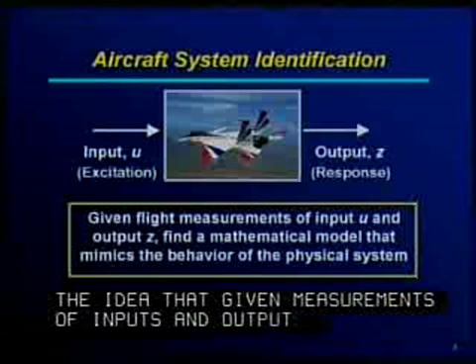The topic area that covers this problem of determining aircraft stability and control, or determining a model of a physical system from measured inputs and outputs, is called system identification. And our system that I'll be discussing here is the aircraft, the rigid body aircraft, in fact, is what I'll be talking about, although it does not have to be rigid. The idea is that given measurements of inputs and outputs to a physical system, we'd like to infer or determine what the mathematical model would be of that system that could behave in an equivalent way, or mimic the system's behavior in some way.

Now, for an aircraft, there are multiple inputs. We have more than one input, of course, and the inputs are generally control surface deflections. So we might have stabilator deflection and canard deflection on this particular aircraft. And the outputs are responses like vertical acceleration and pitch rate, angle of attack, and so on. Now, it's not necessary that the system be the airframe of the aircraft. That's what I'll be talking about today, because that's what's relevant to aircraft stability and control. But system identification can be applied to an actuator, for example, or to an engine. But we're going to talk about an aircraft rigid body in this talk. So, next slide, please.

System identification is really one of three general problems in dynamics. We have the input to the system, which in our case is the aircraft, and the outputs, and the system is the aircraft itself. For simulation problems, we know the inputs because we've measured them from a pilot, and we have a model of the aircraft, and we predict the outputs. For the control problem, we have a way we'd like the aircraft to behave, we have a model of the system, and we compute the inputs. System identification is sometimes called the third problem, or the inverse problem, where we have measurements of the inputs and the outputs, and we try to determine what the model of the physical system is.

You can see from this slide the importance of identification to simulation and control, because the output of identification is a model of the system, which both simulation and control require to do their job. I'm talking at a high level here, of course.

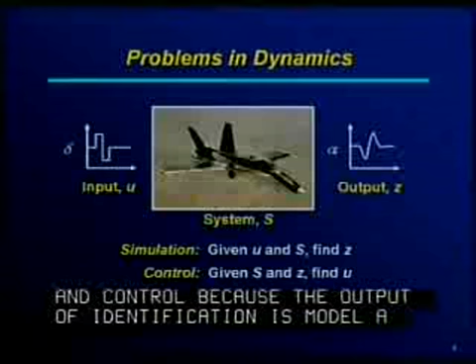I tried to minimize the number of equations I present, but sometimes I just couldn't get around it. What I have here are Newton's second law for translational motion of the CG and for rotational motion about the CG, written in vector form - three-dimensional vectors on the top line and the second line. The MA part of F equals MA is on the left side of these equations. We know the form of these equations, we have for many years.

But what we don't know are things on the right side. We do know the force due to gravity and can characterize that. Very often we do ground tests for the engine, so we also have the propulsion forces. Also for stability and control, a lot of times the propulsion is not modeled dynamically, so we'll have a model for the propulsion from these ground tests that we'll use. That leaves one last term, the forcing function, the aerodynamic forcing functions. The same can be applied to the second equation. We need the aerodynamic forcing function for this equation in order to fill it all out and be able to do simulation and control work.

Now, the difficulty is that there's not, at the present time, an analytical way to do that, aside from computational fluid dynamics, which is still not quite to the level it needs to be to do all those problems. So we want to characterize that experimentally, and what I want to talk about here is how to do that on board the aircraft in real time.

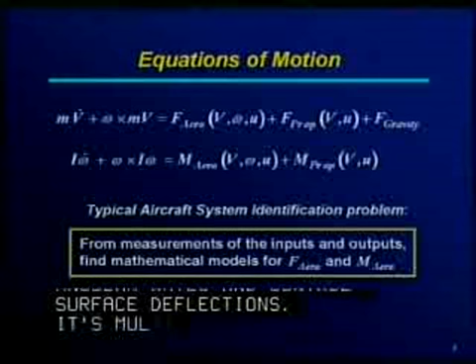One of the things I've tried to get across with this notation is that the aerodynamic forces and moments are nonlinear functions of multiple variables - the speed of the aircraft through the air, flow angles, angular rates, control surface deflections, and so on. So it's multivariable, nonlinear in general, and we'd like to characterize that. For measurements of the inputs and outputs, we need to find models for those forcing functions, what I'm calling F and M for the forces and moments.

As I mentioned, the forces and moments are nonlinear functions of the variables. What I've done here is simplified it way down - I'll only take a look at the lift coefficient, the non-dimensional lift coefficient, so non-dimensional aerodynamic force as a function of angle of attack, and that's all. Of course it's a function of more than just angle of attack, but this is just for demonstration purposes. You see the familiar nonlinear character of the lift coefficient with angle of attack, where there's a stall break at a certain angle of attack. So this is a nonlinear dependency between the lift coefficient and angle of attack.

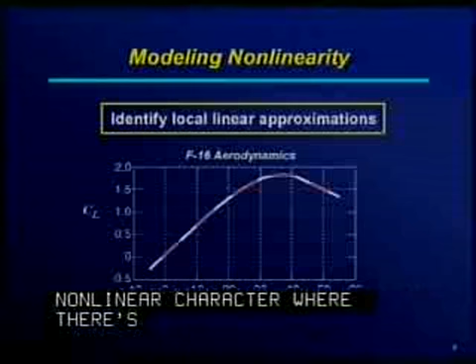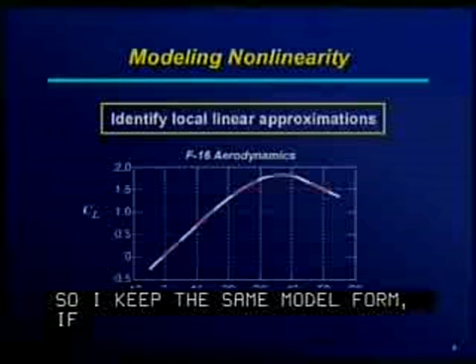One way to describe that is to describe it in local areas of angle of attack as linear approximations. In the aggregate, if I look at all those linear functions together, I can describe very well the nonlinear character of that curve. So I keep the same model form - the lift coefficient is a linear function of alpha - but I let the slope, or CL alpha as it's sometimes called, change depending on where I am locally in angle of attack. This, by the way, is real data from an F-16 wind tunnel test.

Everything I'll show you is either experimental data or wind tunnel data, flight test data for the most part. So no simulation data in any of this. That's the general idea.

We'd like to try to characterize nonlinearity by using a linear approximation with slopes that can change with time.

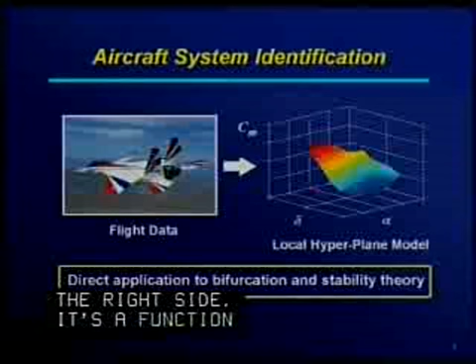So if I go up one dimension now, I'm looking at non-dimensional pitching moment, aerodynamic pitching moment, called CM in the plot on the right side. It's now a function of one of the controls, let's say stabilator, which I'm calling delta, and angle of attack again. I'm still only in 3 dimensions here because that's what I can draw, and you see now I have a surface dependency.

A nonlinear surface is wavy, but I want to characterize that nonlinearity of the pitching moment dependency on alpha and delta, and I can do that with approximating planes. In 2 dimensions, it's a plane, but when there's more than 2 independent or explanatory variables, which there are in general because there's more than one control, we do the same thing but call the approximating planes hyperplanes.

So what we want to do is characterize nonlinearity with hyperplanes that can change their slope according to where we are in the flight variables, or where we are in the independent variable space, explanatory variable space.

Now this approach has legs, and what I mean is that the latest and greatest methods we have for characterizing nonlinear dynamics are based on local linear approximations and the eigenvalues that can be computed from that. So if we have something continually finding the best local linear approximation to what is really a nonlinear dependency, that feeds right into nonlinear dynamic analysis techniques such as bifurcation theory and stability theory.

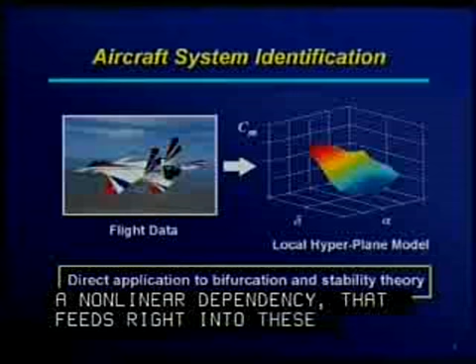So now we get down to some details of how you do that. If I take the pitching moment, and now I haven't non-dimensionalized it, I've kept it dimensional just for notational simplicity, though we could do it non-dimensionally, and in fact it usually is. This is right out of the equation - the thing I need is the pitching moment, aerodynamic pitching moment.

What I want to do is characterize that in terms of a linear expansion in things I can measure, like angle of attack, pitch rate, and control deflection. Here I only have one control deflection, but there are many, so this is simplified in that sense also. On the right side there's this character nu, which is the part that's left over, the part I can't model with this linear approximation, which of course is an approximation.

One reason I want to do this is that I'd like to have a functional dependency description in terms of things I measure, like angle of attack and pitch rate, so I can predict what the pitching moment will be. That's my goal. It turns out you can do this kind of modeling equation by equation - individual equations, and here I'm just looking at the pitching moment equation.

One approach is to say, well, in that pitching moment equation, I know everything except the aerodynamic forcing function. So I solve that equation for everything except that, right? And on the right side, I have measurements of alpha and q and the control deflections.

For a modern flight test aircraft, the data system can measure all these things at about 50 hertz - that's 50 times a second I can get measurements for alpha, q, and delta, and measurements for the left side because I have measurements of everything else in the equation except the pitching moment. So I can write this equation down 50 times every second, but I've only got 4 unknowns if you look at that equation. So I've got 50 equations and 4 unknowns - it's an overdetermined set of equations, which I can solve with linear least squares. That's the general idea of how to go about this.

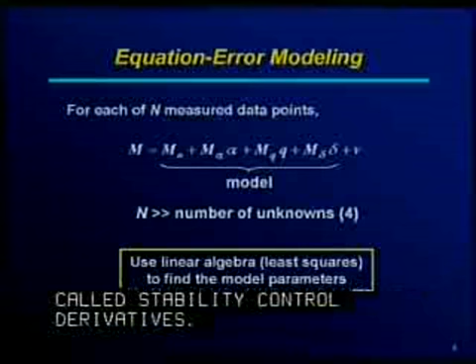Now, of course, every second—or maybe every 2 seconds—I get a new set of points, then I do it again, and I get different slopes with different characteristics. These characteristics, the M alphas and the MQs and so on, are called stability and control derivatives, as many of you probably know. They have physical interpretations. The M alpha, for example, is a static stability term. The MQ is a damping term. And the M delta are control power, control effectiveness.

So the values of those quantities can be interpreted in terms of the stability and control of the aircraft. That's the idea, and the number of points is much greater than the number of unknowns, so we can use linear algebra to do this in what they call a one-shot solution—in other words, we don't have to iterate to get this solution, we can do it in one shot. You might also note that what we're really doing is using a multivariable Taylor series expansion and dropping all the nonlinear terms, just using the linear terms.

All right, next slide, please. So.

Why would you want to do this? Aircraft system identification—I have several reasons here, there are more. But in general, one reason is what we call flight envelope expansion.

We have an aircraft that maybe is predicted to fly in a certain way, and we start out flying it in a safe region, then systematically do testing and analysis to look at the stability and control characteristics as we move up in, let's say, Mach number or angle of attack, making sure the aircraft is okay to continue. That's very time-consuming, usually done flight by flight, very carefully and methodically. System identification is right in the middle of that, because that's how we analyze the flight data to determine stability and control.

Also, the next few items—the two at the bottom—are what we already talked about: simulation and control design both require models of the aircraft, and these models can be updated and made more accurate using flight results.

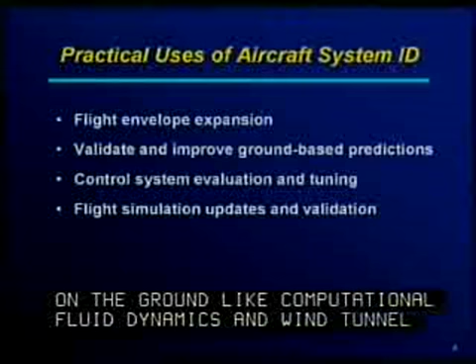And also, another reason to do system identification is that prediction methods used on the ground, like computational fluid dynamics and even wind tunnel testing, we'd like to know after the fact how close those predictions were to what the aircraft actually does. And what the aircraft actually does is determined using these system identification techniques.

This slide is just to describe that it's not easy to do this for a number of reasons. One of them is that the aerodynamic dependencies are not simple, as I discussed before—they're multivariate and, in general, nonlinear.

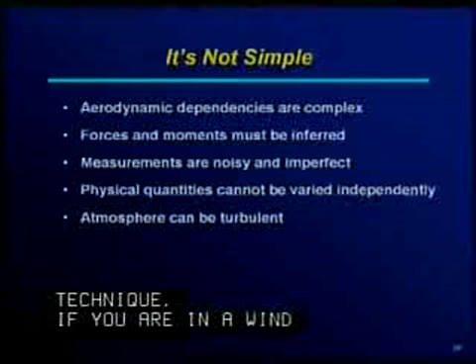The forces and moments have to be inferred from the equations, as I mentioned in passing. If you're in a wind tunnel test, you can put a model on a sting and measure the forces and moments directly through a balance. In an aircraft in flight, you cannot do that, because it's a free body flying in the air. So what we do is infer what the forces and moments must have been by measuring everything else in the equation except for the forces and moments.

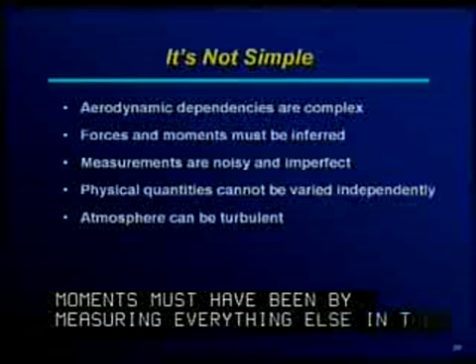Measurements are noisy and imperfect, like they are in any experiment, which is equivalent to saying we want to see the truth, but we have to look through a little bit of fog to see it. That complicates matters, of course.

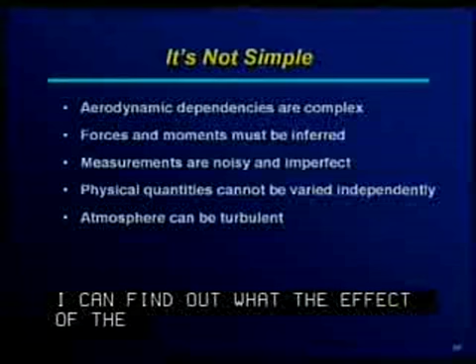The physical quantities cannot be varied independently. Looking back at a wind tunnel test, I can put a model in the wind tunnel and change the stabilator deflection without changing anything else, and by that means find out what the effect of the stabilator is. For an aircraft in flight, as soon as I move the stabilator, the aircraft pitches, the angle of attack changes, and so on. So you have a more complicated situation—I can't move one thing at a time with everything else fixed; as soon as I move one thing, everything's in motion. That complicates the experiment design.

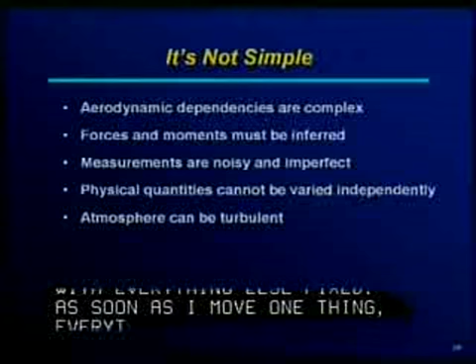Further complicating it is that a lot of times you have aircraft with active feedback control operating, which essentially means I'm going to start moving the stabilator, for example, in response to pitch motion.

Since the control law is doing that, it's actually correlating those variables. And if you remember back to the slide when we talked about identification, I need all variables doing something differently so I can tell which one is responsible for which variations in the pitching moment, to get those influence coefficients. This complicates things, and the atmosphere isn't always still—it's turbulent, which can be equated to an unmeasured input. So all these things make the problem difficult.

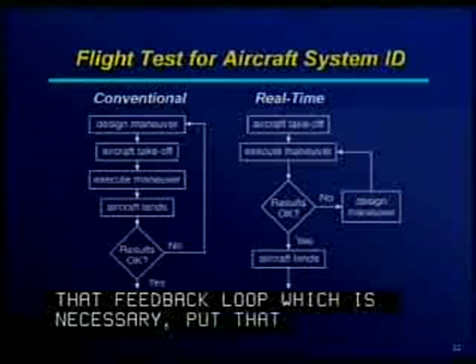So one idea that's come up is: why don't we put that necessary feedback loop inside the aircraft's takeoff and landing? In other words, do it in flight while the aircraft is still flying. You take off with a maneuver you start with, then analyze the data online while the aircraft's in the air, iterate by redesigning the maneuvers, and don't land until you're sure you have the data you were after. This makes for a huge improvement in efficiency, especially for things like envelope expansion.

Next slide, please. So one of the first projects to use this sort of idea was the NASA Pathfinder. This aircraft was solar-powered, 99 feet wingspan, and flew very slowly. It was a very flexible aircraft, as you can see from the picture, and it had unsteady aerodynamic effects as well as flexibility.

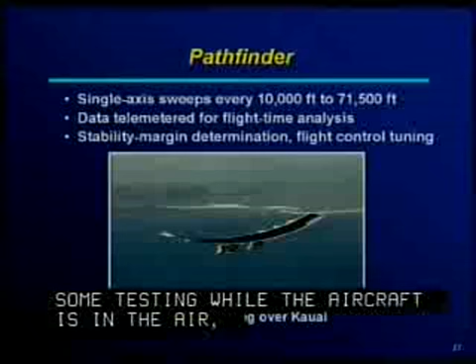One idea that was developed and executed in this project was: why don't we do some testing while the aircraft is in the air, telemeter the data down, do the analysis on the ground, and then based on that analysis either change the control gains or continue flight tests with the gains as they are. This was done with single-axis frequency sweeps, where one control at a time was moved in a slow sinusoidal fashion, progressively increasing in frequency, to get a wide range of frequency inputs to characterize the dynamics. A spectral frequency response estimation method was used for the modeling.

So this was done every 10,000 feet for this aircraft. The aircraft took about 50 minutes to climb every 10,000 feet, so there was time to do this. The data was telemetered down, it was analyzed, people made the decision about the stability margins and the flight control tuning, whether the gain should be changed. That was dialed in from the ground, and then onward to the next point.

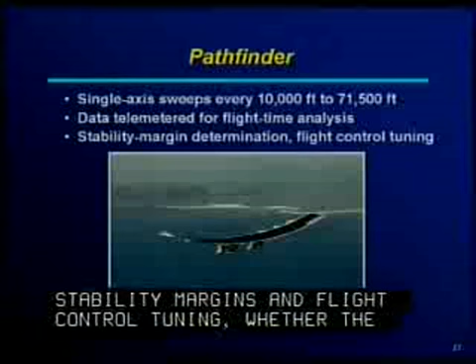And this worked very well, and in fact, the Pathfinder set a record of 71,500 feet. It was a record for both propeller aircraft and solar aircraft at the time, later broken by other aircraft, but this was a record at the time. So this was the first sort of approach to having the analysis go on while the aircraft was in the air, and it was feasible because this aircraft was very slow and climbed very slowly. There was a lot of time to do the testing.

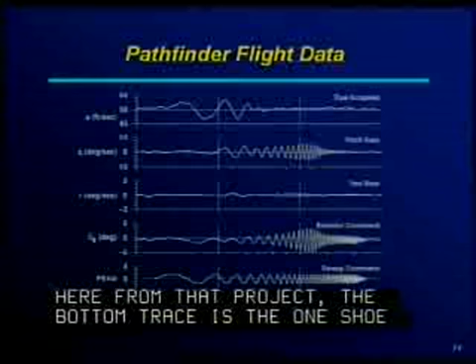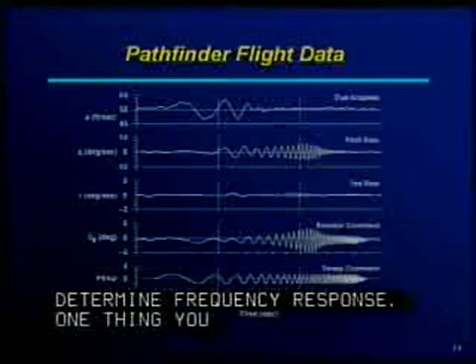Next slide, please. So I'm just showing a little flight data here from that project. And the bottom trace is the one you should look at there. That is the frequency sweep that I spoke of, where we move one surface first into slow frequency and then an increasing frequency as it goes up, and then use what they call spectral estimation to identify a Bode plot, you might say, or frequency response. But one thing you might know from this plot is that you need, when you use that method, it takes quite a lot of data to do it, to get good spectral estimates.

And in fact, you see there's 90 seconds there, and that's 90 seconds for each input, right? So each control, done one at a time, right? Which is feasible on this aircraft, but we'd like to do things faster than that.

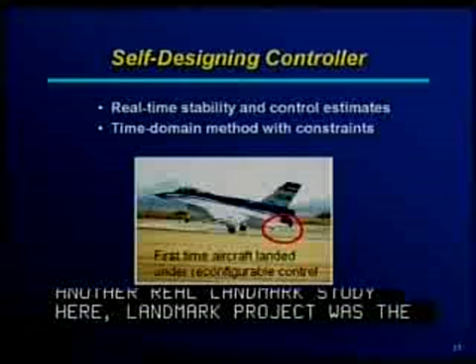Next slide, please. Another really landmark study or landmark project was the self-designing controller. This was an Air Force project, and it was executed by a company called Barron Associates in Charlottesville, Virginia, and also by Lockheed. The idea here was to use real-time stability and control estimation in a manner similar to what I described before, to feed that information as the aircraft changed in flight condition, or maybe would change due to damage or a failure, and to feed that into a reconfigurable controller. And in this case, it was a receding horizon controller, they called it, and have that reconfigure the aircraft control to have it still be controllable and survivable.

One of the main points of this, or one of the things that made a big splash about this project, was that they were able to land the F-16 Vista with a simulated left stabilator failure. So left stabilator was stuck. They had their online estimation routine go through, figure out what the stability and control derivatives were, and reconfigure the control law, or feed that information to a reconfigurable control law to enable the aircraft to land.

So this made a big splash in the field, where you could see the possibilities of this kind of technology. Now, the estimation technique that they used was a time domain method, similar to what I described, but with constraints. And what I mean by that is they had a priori values of the stability and control derivatives, and also some time constraints, some temporal constraints, which needed a bit of tuning to make that work.

And also, that technique did not provide error bounds for the parameter estimates. But still, just an excellent project. And this technology was also used on other projects as well. It was used on an SBIR for the F-18 closed loop reconfiguration, and also on the X-40A project. So, next slide, please.

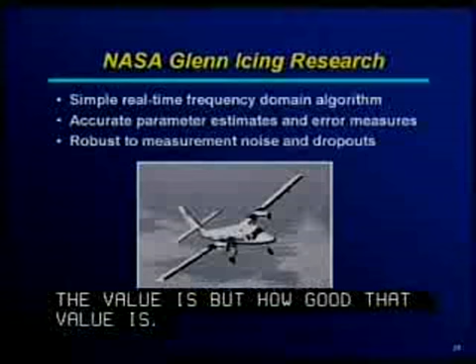So when we estimate these parameters like M alpha and MQ that I showed before, we like to know not only what the value is, but what the error bar is, how good that value is. Those are two important components of getting estimates for these things. So it gives those, and it's really the only technique that does that - it gives the error bars as well as the parameter estimate. The time domain techniques do not do that. And also, it's very robust to measurement noise and dropouts. And of course, when we're doing things online on the aircraft, there's no chance to fix dropouts or to smooth out the noise or filter the noise. There's no chance for that. So, I'll talk more about this technique as we go on. Next slide, please.

Later, at NASA Dryden, as part of the F-15 ACTIVE program and also the IFCS program, Intelligent Flight Control System program, there were some experiments on what kind of inputs should be used for this real-time parameter estimation or real-time modeling. I'll show some results from that also as we go on.

These models are being flown at NASA. These models, as well as others, are associated with an infrastructure called the AirStar system.

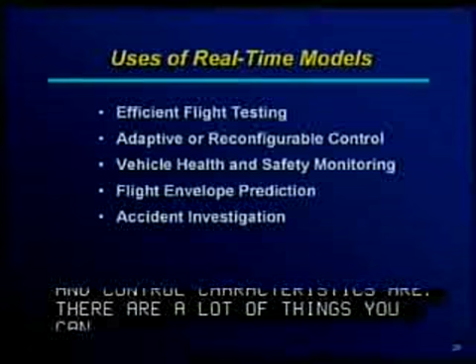This real-time modeling is an area that the more you think about it, the more ideas you come up with for ways to use it. Because what we're really trying to do is have the aircraft at all times have an idea what its own stability and control characteristics are. There are a lot of things you can do with that, one of which is flight envelope prediction. It can also be very useful for accident investigation if you have this kind of information.

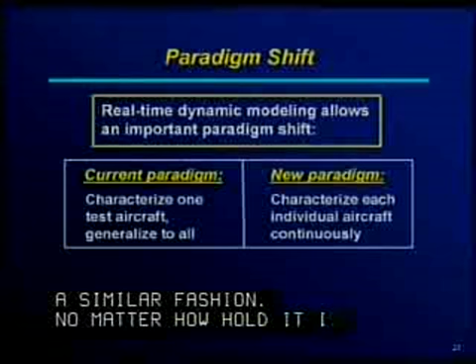So what I have on this slide is a little description of a paradigm shift you can entertain. If you had real-time dynamic modeling, you could change the current paradigm, which is this: we have one or maybe a few test aircraft that we test very thoroughly, and then we assume every other aircraft like that behaves in a similar fashion, no matter how old it is or what's happened to it. If we have real-time modeling or monitoring of the stability and control of the aircraft, we can change that paradigm to characterize every aircraft as it is at its own time, whether it's aging or damaged or something's a little different about it.

We already know that when you get to flight regimes like high angle of attack and high rate, very small changes in the geometry of an aircraft can cause very large changes in the response. So this pushes us towards the method of characterizing each individual aircraft as its own, with its own characterization of itself.

One of the things I mentioned to a colleague recently is that what I'm really trying to do is put somebody like me out of business, because we're trying to get the aircraft to characterize itself, collect its own data, and have it so we can tell a pilot to go fly this aircraft, do some maneuvers—or have the computer do some maneuvers—land the aircraft, and download an updated simulation of the aircraft. That takes me out of the loop completely, which would be okay. There are plenty of other things we could do, but that's one of the goals.

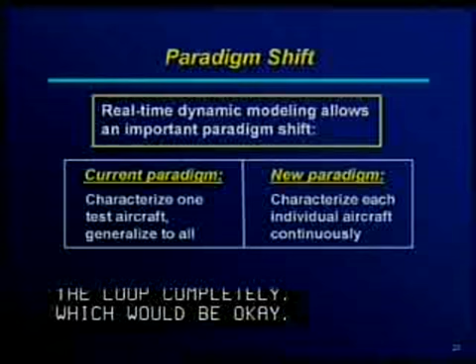So I'd like to now talk about some technical challenges in pulling this off, this being characterizing the stability and control all the time for full envelope flight on board the aircraft. There are a couple of things I wanted to point out that are the main problems at the moment.

One is excitation, which I think we have a good solution for, as I'll show you. Another is data memory, which we don't have a good solution for at the moment—we need to work on that. And there are some practical implementation issues, which I believe we do have answers for. So it's kind of a mixed bag, and of course, as with all research, you go along and find more things you need to address. But I hope I can convey that we're very close to the point where we could have an aircraft characterize its own stability and control all the time.

So what that means is that if I want to know what happens when the elevator or stabilator changes—if I want that linear influence coefficient—I'm going to have to change the elevator to see what happens. You can't just fly along steady. There are a lot of times when an aircraft flies along and nothing's happening, in a steady state—when you fly across the country, for example. So you can't find out what these influence coefficients are unless you move something.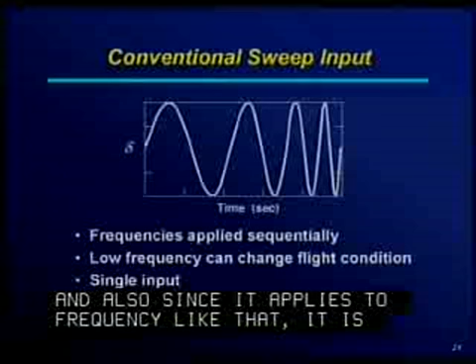One of the problems, though, is that we apply the frequencies sequentially. We start with a low frequency because that excites a low frequency mode, which we need to wait a long time to see since it has long periods. So we start low and then go higher. The problem is the low frequency oscillation sometimes moves you off your condition, moving you from the point that you started at, away from that tangent approximating hyperplane, to somewhere else during the experiment. We don't like that. Also, since it applies frequencies sequentially, it's not efficient, and this type of input works for a single input only, and aircraft have more than one input, so you have to repeat this for each input in turn.

So one idea is: why not take different frequencies—not a continuous stream, but discrete frequencies—and add them all up and apply all the frequencies at once. For example, if I have three frequencies for the input, applied to the stabilator of the aircraft—a mid-frequency, a higher, and yet a higher one—and I add those up, I get the white trace shown on the right. Sometimes the peaks add, sometimes they cancel, and during that time series I get large excursions. I don't like large excursions because they tend to push me off my condition.

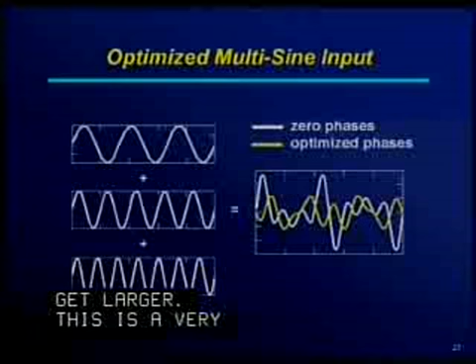So one of the things you can do is take each sinusoid and shift it in time relative to the others, giving them a phase shift, and optimize that phase shift so the peak-to-peak amplitude of the sum is minimized. If you do that, you get the yellow trace, where the peaks are all mashed down to where they're approximately equal across the whole signal, optimized for that. That's as low as you can go. With three frequencies added here, the difference between the large peaks on the white trace and the peaks on the yellow trace gets bigger as you add more frequencies, because more frequencies means larger peaks. So this is a very good technique to still get all the energy into the input without large excursions that push me off my condition. I really want to stay around one condition and do my oscillations locally to that.

So what I want to show you now is a clip from flight test data. This is on the NASA 837 modified F-15 out at Dryden. What they're running here is the equivalent of the white trace before—we just took some discrete sinusoids and added them up. If you watch the background while this is flying, you'll see what I was talking about, this moving off condition. Could we run the first clip, please?

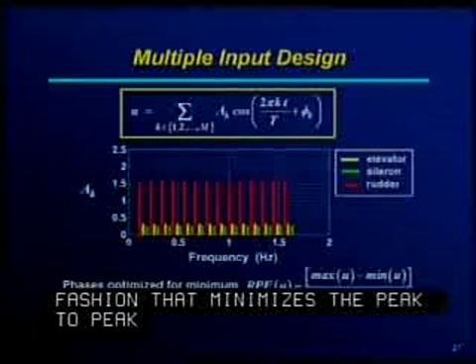So what we'd like to do instead is have these optimized multisines, as we call them, where we shift the phases of the individual components for each input in a fashion that minimizes the peak-to-peak amplitude, so we don't get these large excursions off our flight condition. This technique can also be used when you have more than one control input, which we always do.

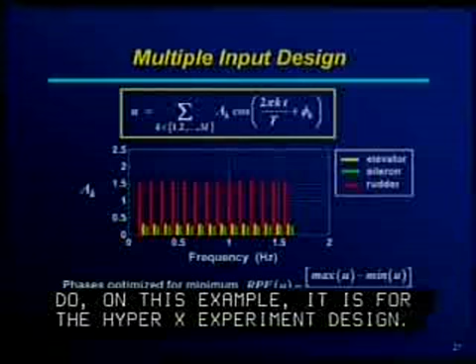This example is actually for the HyperX, from the HyperX experiment design that I'm going to show you in a minute. What you can do is choose these sinusoids so that they're harmonics of one another—a whole set of harmonic sinusoids. If you remember from your math, harmonic sinusoids are orthogonal to each other in the time domain.

So I have harmonic sinusoids that I apply to the three controls, using different frequencies for each control. By doing that, in the time domain, since they're harmonics, they're orthogonal to each other—meaning if I did an inner product of the two time series, I'd get zero. Or, they're the most unlike each other as they could possibly be, another way to say it.

Since I'm using different frequencies, I interleave the frequencies for the different controls, as shown here in the plot. The rudder uses the frequencies in red, the aileron uses the frequencies that are green, and so on. So in the frequency domain, it's also orthogonal—these inputs are orthogonal because they're using different frequencies. This type of input has a great advantage: it produces inputs that are orthogonal both in the time and frequency domain.

So no matter which domain you use for the analysis, you still have orthogonality of these inputs, and that's very important so you can assign the dependencies properly, as we talked about. They're optimized to minimize the peak-to-peak amplitude, shown there in the bottom right, and then there's a measure of the input energy on the bottom. So we want lots of energy in, without too much peak-to-peak amplitude excursion.

The other thing I want to mention is that when you interleave these frequencies, each input has a wide frequency band, because they take turns taking the subsequent frequencies, which are all harmonics of one another. If you just look at the rudder frequencies, there's a wideband input there, and there's a wideband input for the aileron and also for the elevator.

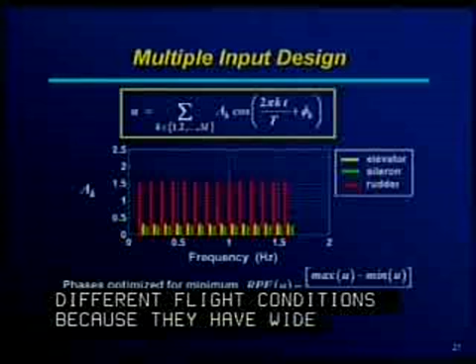So the advantage of this is that you can design the input form one time and use the same input forms for different flight conditions, because they have a wide frequency band. If the natural frequencies float around inside that frequency band, it doesn't matter—you'll hit it somewhere with that wide frequency input.

This is a big advantage for flight test programs, because a lot of times, especially if a computer is doing the input like happened here on HyperX, the computer doesn't have a lot of extra time and space for computing inputs. So we give them one sequence: this is the sequence to run on the rudder every time, and at the same time, run this on the aileron, and at the same time, this on the elevator. Then we only scale the amplitudes for dynamic pressure. It makes for a very efficient test.

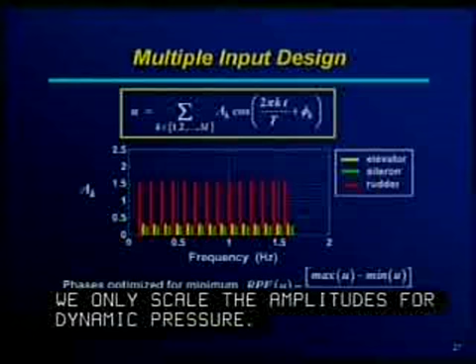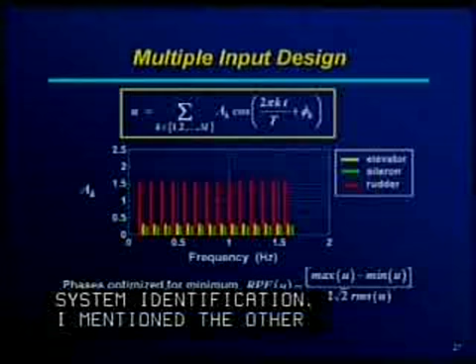It's very brief because everybody's moving at once. We do the lateral and the longitudinal data collection all at once, and we have only one input form. So these inputs are really excellent inputs for system identification. In fact, I mentioned to someone the other week, it's hard for me to imagine how they can get any better than this. It's really a very efficient input. So let's go to the next slide.

I want to show you now how these inputs were used on HyperX during the descent phase of the flight. Next slide, please.

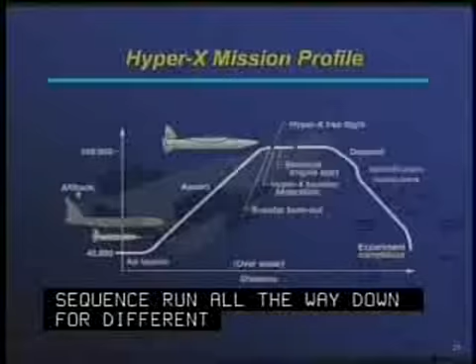So if we could run the next video clip, please. What I'm going to show here now is flight test data run through an animation, because we don't have pictures of the HyperX in its flight. What it's doing is executing this maneuver, which is elevator, rudder, and aileron working all at the same time in an orthogonal fashion. And you see what happens is the motion of the aircraft looks similar to what you might see if it was going through some turbulence.

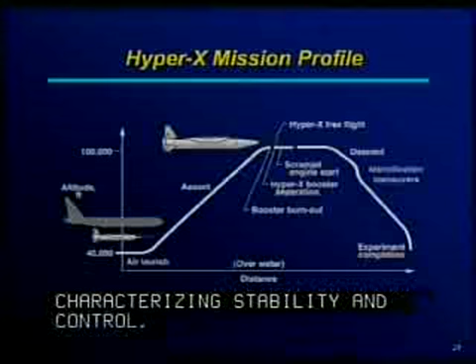The advantage of this is that it keeps the aircraft on its trajectory and just bumps it around a little bit, so the guidance and control guys are very accepting of this type of experiment because it keeps them on their trajectory, doesn't move them off the trajectory, but still you get this excellent flight data for characterizing the stability and control. Because of that, these types of inputs are also being used on the Air Force Falcon project for the same sort of reason, that you can stay on your condition and still collect excellent data. So let's go to the next slide.

What I'm showing here are some results from the flight test data analysis on HyperX, and this is actually the data that you just saw animated. What we're looking at is the pitching moment, the non-dimensional pitching moment, which is CM, in the middle plot there. The data is the white line, and the model is the dashed orange line. As you can see, the model that we identify, and the top line there is the elevator deflection that was designed in the way that I mentioned before.

You see that this looks like something like a random sinusoid. It's not random, of course, but it looks like that - like a buzz on the surfaces, is what I call it sometimes. So we buzz the surfaces. We did that for about 28 seconds or so, maybe less, and collected the data and did the modeling.

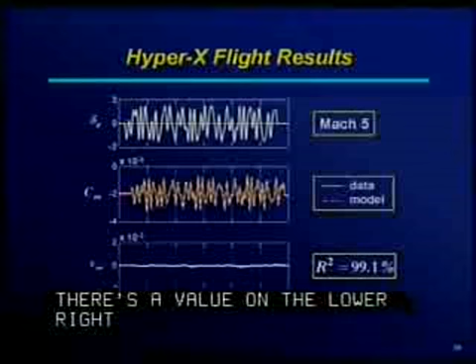The experiment was so good that the modeling, as you can see there, the model matches the data almost perfectly. There's a value in the lower right there called R squared, that's a measure of the model efficiency, the amount of variation that's been explained by the model. It's 99% out of 100. The bottom trace is the difference between the solid line and the dashed orange line, so you can see it's almost a flat trace.

Of noise. I've told people back at Langley I may show these data for the rest of my career, because it doesn't get any better than this. The experiment design was so good that the modeling results just came out terrific. It looks like what a simulation case looks like usually, but this was all flight data. So let's go to the next slide. This was at Mach 5.

I want to say, before I go on, that was not a cherry-picked result. All the results were like that. They all did that well.

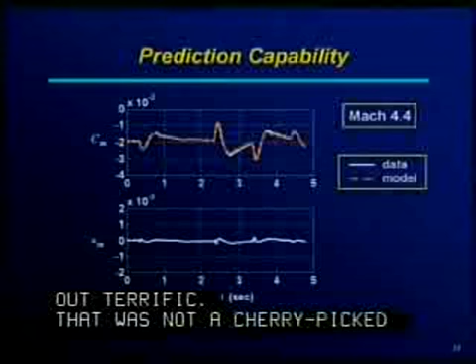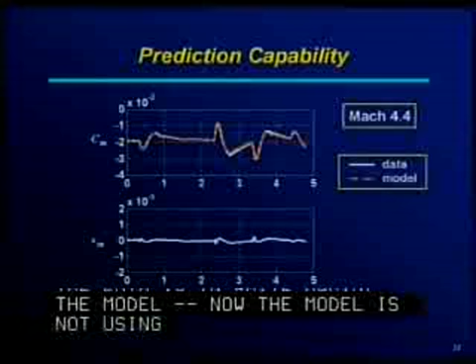One of the things we do to validate that our models are good is try to predict for another maneuver where the input form was different. If we have a model that predicts well, then we start believing that model is pretty accurate. So on HyperX, we had maneuvers following those sweeps that were of different form. They were square wave forms, shown on the top plot there. The data is in white again in the model. Now the model is not using that data. It's using the model that was identified from the sweep before and trying to predict this data.

This maneuver was run later in time, actually at Mach 4.4. The aircraft was losing Mach number as it went down very rapidly, and that value is even an average. If you look at the Mach trace as the aircraft descended, it wasn't a straight line, it was decreasing continuously. So there's a little bit of mismatch near the end, but that could be attributed to the Mach effect, because by the time we got to the prediction maneuver, the Mach was different. But it still did a really nice job of the prediction.

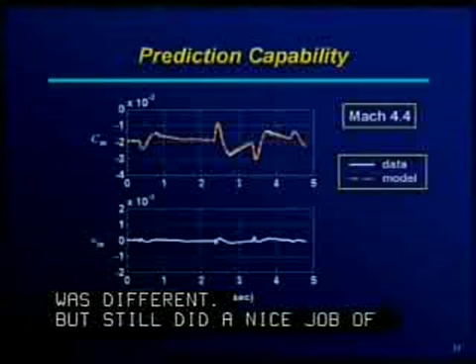So the point of all this is to show you that kind of input is very efficient. It moves the aircraft off the condition very little. It's like a turbulence input, and it can be done on all the surfaces at once for a very short time. That's exactly what we're looking for to do this real-time parameter estimation. Next slide, please.

Another issue is what I call data memory. What that means is when something happens to the aircraft, maybe it's damaged, or even if it goes to a different flight condition, what you really have is a different aircraft. So what do you do about that? You just say, I'm not going to remember anything from the past, I'll start over right now. Or do you say, I'll remember a little bit from the past, I'll just forget some of it. Or do I do something else? Do I say, well, I'll go back to what I knew from before, the last thing I knew from before?

Or do I say, all bets are off, I need to buzz the surfaces right now to figure out what's going on? All those questions, when to buzz the surfaces, when to remember, when to forget, those things have not been figured out, and they have to be. But that's for future work. It's one of the things we need to do to make this a technique we can use all throughout the envelope. Next slide, please.

So here's some practical implementation issues I want to talk about. Let's go to the next slide. I'll go through all of them there.

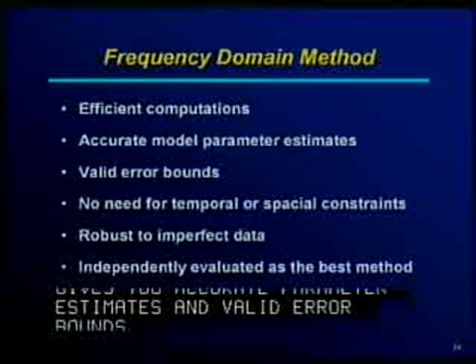I want to tell you about this frequency domain method, which is very efficient in its computation. It gives you accurate parameter estimates and valid error bounds, as I was talking about before. We don't need to use constraints, as with some other methods. And it's robust to imperfect data, which I'll try to show you. And finally, this method is the one I'm most familiar with - that was another reason I'm talking about it. But it's also been evaluated independently, by people not associated with it at Langley, by two different groups that were interested in looking at different real-time methods, and both groups came down on the side of this particular method as the best to use, which I agree with.

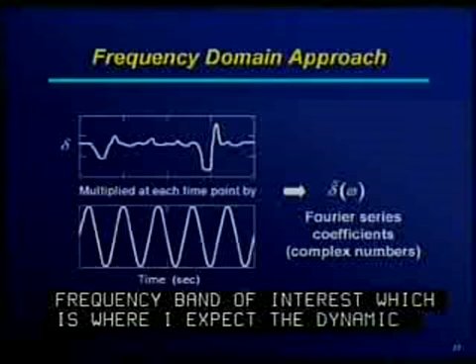So let's go on to the next slide. So here's how it works. If you have some time history of, let's say, a control, shown on the top plot there - maybe a pilot input or a control surface time history - what you do is say, I want to project that time history onto sinusoids at different frequencies, and I'll choose what those frequencies are. In fact, I'll choose frequencies that are in the frequency band of interest, which is where I expect the dynamic modes of a rigid body aircraft to be. Every time I do that, I can do what they call a Fourier transform and get a complex number called a Fourier series coefficient. Now, normally that's done in batch calculation, but I'll show in the next slide.

Let's go to the next slide, please.

It can be done very easily recursively, and the way you do it is this. If you look in the middle there, the batch Fourier transform is essentially a projection of the time series you're interested in onto a sinusoid, and the sinusoid is a complex sinusoid, e to the minus j omega t. In batch, you would take the entire time series and multiply it point by point onto the frequency sinusoid, and get a number, and that number is the Fourier coefficient.

But if you look at that summation and write it out, you find out that you could do that very easily recursively. Every time a time point comes in, you multiply it by the corresponding time spot in the complex sinusoid, and add that to what you had from last time. So you can do this, and this would really be called doing the Fourier transform the hard way, in other words, not using a fast Fourier transform.

But what we do is say, well, we don't need to do all the frequencies when we do this transformation. We just want to do the ones that are in the range that we expect the rigid body modes to be, and give a little extra on either side. So that's the trick. We do the Fourier transform the hard way, but we do it only for limited numbers of frequencies, right where we're looking, right where we expect these dynamic modes to be and where they really have to be.

If you do that, you maybe limit your frequency band to 0.1 to 1.5 hertz or so. And if you use a discretization of 0.04 hertz, which we found to be pretty good, although it's not very sensitive to that, so that's 36 frequency points. So 36 frequency points for each signal, and maybe you have 10, 12 signals to do this. So it's not a lot of computation, really, to do that, to do these recursive transforms.

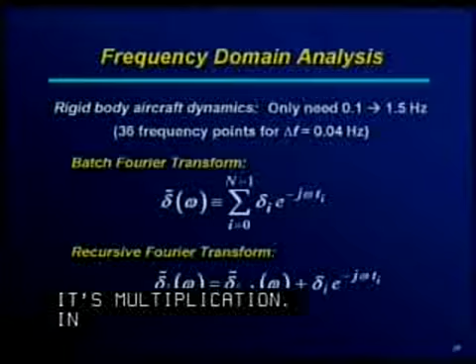And if you look at the recursive relationship at the bottom, it's really to update that transform at a single frequency. It's a multiplication by a known quantity, which is e to the minus j omega t, and an addition. So one multiply, one add, and that is updated for that frequency. Of course, there's 36 frequencies for each one, let's say, but that's still a very small amount of computation, and really pretty simple to do.

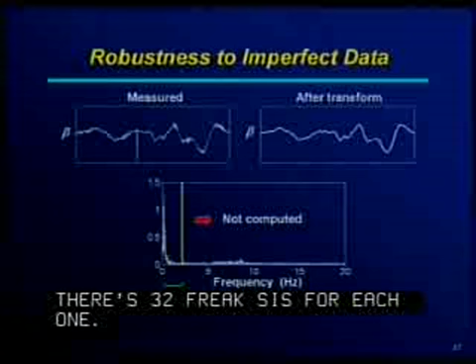Next slide, please. So that would get the data into the frequency domain. A byproduct of doing that for the limited frequency band we're talking about is that you get rid of some imperfect data problems. And what I mean by that is this.

If you look at the side slip angle trace on the upper left, that is real flight data, and it has a dropout in it. As you can see the dropout there, one value where it goes a very large amount away from all the other values, and it's noisy.

If you do a Fourier transform as I described and only use a limited band of frequencies, you get not only a cleaning of that noise, because most of the noise is wideband, and maybe there's some structural responses and so on. But that noise is discarded because it's actually not even computed, because when you do the transform into the frequency domain, those components, which are shown in the lower plot towards the right, those components are not even in the transform. They're taken out completely because I never even computed them.

So it's an automatic filtering operation to use this limited frequency band. And it turns out also that when you do that, the effect of a spike or a dropout is also mitigated, as you can see.

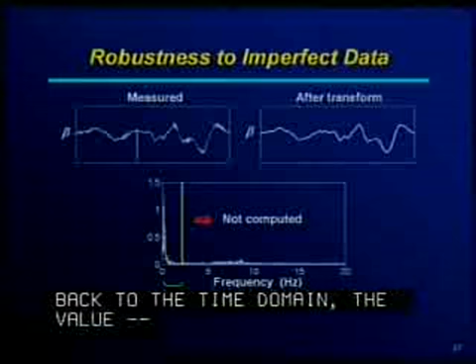So what I've shown in the upper right there is after the transform. In other words, if I only transform for that limited frequency band, and then I go back to the time domain, the value or the equivalent of the time series that I'm using is up on the upper right, where all the noise has been cleaned off and the dropout has been removed. So all this happens just as a natural byproduct of doing this transform for a limited frequency band. It's a nice way to approach it, and I don't have to do anything extra to get this benefit.

So now we're back to where we were before, talking about time domain modeling. This is really what they call a regression. We're trying to predict the pitching moment as a linear function of things we measure, like alpha and Q.

The only difference is now I've taken all those time series I was talking about before and put them into the frequency domain for the limited frequency band. One advantage of this is that even if I fly for 2 hours, I still have only 36 frequency bins, because as I go along in time, I keep computing the Fourier series coefficients and modifying the values for these 36 bins for each signal. So even if I fly for a very long time, I still only have 36 frequency points.

The least squares modeling and everything else I said about the modeling before really applies the same way to this frequency domain technique, except that in the frequency domain, the data is complex numbers because of the e to the minus j omega t used in the transform. But other than that, that's a small tweak. You can still do the least squares problem the same way as before, practically.

One other thing I want to mention is that when you do least squares modeling, the least squares technique always tries to minimize the biggest residuals it sees, so large values get paid attention to quite a lot. In the frequency domain, those large values are dominant modal frequencies, which is exactly what we wanted to minimize the difference between the model and the data for. In the time domain, if you have a dropout, for example, the least squares technique tries to minimize the difference between the model and that dropout, which is exactly what we don't want it to do. So that's another advantage of doing things in the frequency domain.

So I want to show you now a flight test demonstration. The optimized multi-sine inputs were run on the NASA 837, and although the data was not analyzed on board, the analysis I'm going to show you was done after the fact on the ground. But we did that in a manner similar to running the data through the algorithm as if it were on board.

This is not very clear, but what I'm going to show here is on the right side are traces of response variables and controls, and you'll see characters like you saw on the HyperX problem, these multi-sines. The bottom trace on the right is the stabilator deflection, the top trace is angle of attack, and the middle trace is pitch rate.

On the left, there are three of the stability and control derivatives. One is the vertical force due to angle of attack, that's the top plot. The middle plot is pitching moment coefficient due to angle of attack, or M alpha, as we showed before, and the bottom is the stabilator effectiveness, or M delta S. The yellow lines are the values that were computed.

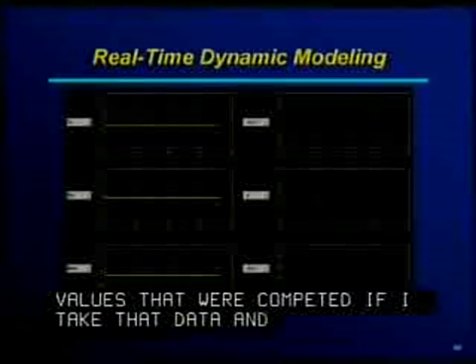If I take that data offline and use a nonlinear iterative method, the best method we have offline to estimate these parameters, that's the value I get. So I took this data, analyzed it with our nonlinear iterative method, the best thing we have on the ground, and we drew those lines.

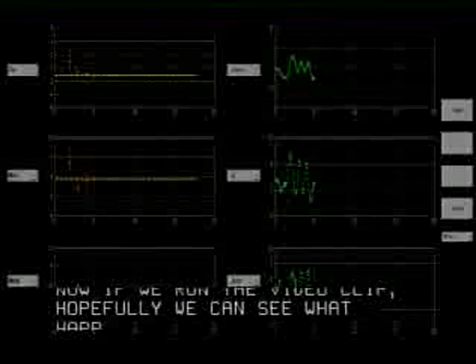Now if we run the video clip, hopefully we'll be able to see what happens as the data goes through in time on the right side there. On the left, the dots or markers that you see are the estimates that this frequency domain real-time parameter estimation technique is producing for those values.

And the error bars are 2 sigma error bounds. I don't think it's real clear there, but let's go to the next slide, maybe we'll see it a little clearer.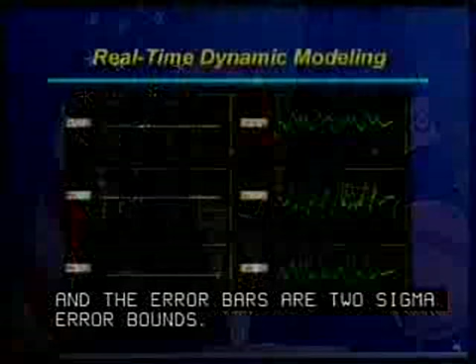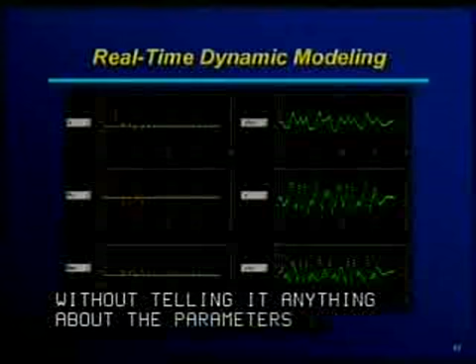On the left side, you see that at the beginning, this technique is run without telling the algorithm anything about the parameters. It doesn't know anywhere on the real line where to look for these parameters. It's got no information whatsoever. So after just a few seconds, it's figured out where those stability and control parameters should be, if you define where they should be as the answer the iterative nonlinear method gets when it sits on the ground and iterates through the data.

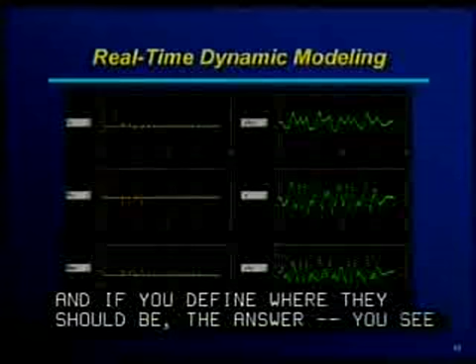You see it only takes, maybe you can't see, but after only about 3 or 4 seconds it's already figured out what those parameters are. And the rest of the time it's just staying right on where they are, and it's not moving.

That shows you both the efficiency of the inputs, these multi-sinusoids, and also the fact that it doesn't take the frequency domain method very long to lock in on what the stability and control derivatives are. In fact, one of the things we need to study is how long these inputs have to be, and what amplitude. We haven't made that study yet, but you can see from this that it doesn't look like we need much past 5 seconds.

When you're talking about doing this modeling for something like dynamic motion, the short period motion, the period of that motion is about 2 or 3 seconds. So any algorithm is going to need to see about 1 period before it figures it out. So it's almost down at the minimum already, as it is.

But we might be able to get even faster if we give it some what we call a priori help. In other words, instead of telling it to look at the real line and tell me where this number is, we might say, look over here. It might be over there, or about -10 or so. Start there. And if you do that, then you can make it even faster. So let's go to the next slide.

For onboard computations, using the frequency domain method I described, one of the nice things about it is that for the number of frequencies you select, those are fixed, as I said. Even if you fly an hour, it's still 36 points. And that keeps the computations way down.

The recursive transform is very simple, as you saw. It's a multiply and an add for each frequency, for each signal. And you can do it for any selected frequencies, the ones that you select. So we've been talking about rigid body dynamics, but if I decided I wanted to do a different problem, a more complicated problem where we're looking at structural dynamics, I could just shift the focus of the frequency transform to a different frequency band and look at that instead.

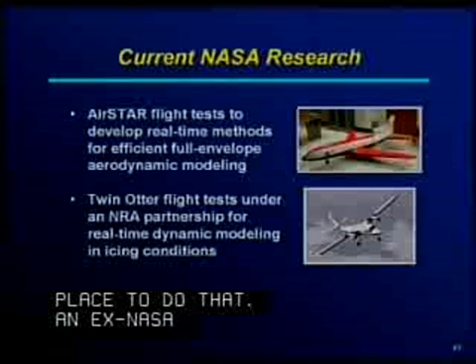The main problems in icing conditions is, for example, you don't want to necessarily buzz the surfaces when you're in icing conditions. Also, icing conditions tend to be associated with turbulent air, and we know already that turbulent air is a problem because that's an unknown input. So that's a very challenging problem, but we have an excellent team in place to do that. We've got an ex-NASA pilot and icing research experts from NASA Glenn, and I'm working on that also. So we really have a nice team, I think, to make progress there.

Next slide, please. What I want to show you now are some flight tests from the AirSTAR program on the T-2 aircraft, which is shown there in the picture. I'll note also that this flight test was done last week, last Thursday is when we took this footage. So let's go ahead and run that video.

All right, throttle check. These are just general shots of our operation and the ground crew getting the aircraft ready to fly. There's what they call a UAV runway at NASA Wallops to be used for this testing. That runway is right next to the shoreline.

At the present time, we're flying these aircraft with RC control. There you see the RC pilot with his RC transmitter. But we're moving towards actually flying this from inside the MOS, or inside the truck. We have synthetic vision displays that were just checked out last week and look to be very, very accurate and looking really excellent for that. We're still trying to work towards that.

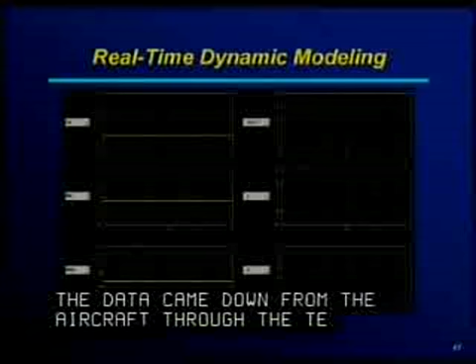So what I want to show you now is some data from those flights. Let's go to the next slide, please. This is in a format similar to what I showed you for the F-15, but the difference here is that what I'm showing you now is what was shown to me at my workstation in the MOS inside the truck while the aircraft was flying. In other words, we had the real-time parameter estimation and real-time dynamic modeling software running in real time. The data came down from the aircraft through the telemetry system that's operated by the MOS or by the truck. That data was sent over an Ethernet connection to a laptop right next to me, running this algorithm in real time.

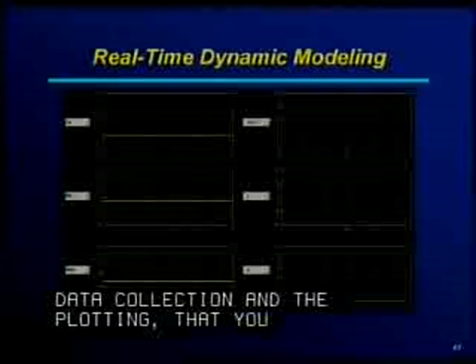So we're doing all this data collection and the plotting that you'll see here, and I still had to slow down the laptop to do that. It still had, I was doing this at 50 hertz, and it was taking only a small fraction of that frame length to do it. So we still had plenty of time in the computation.

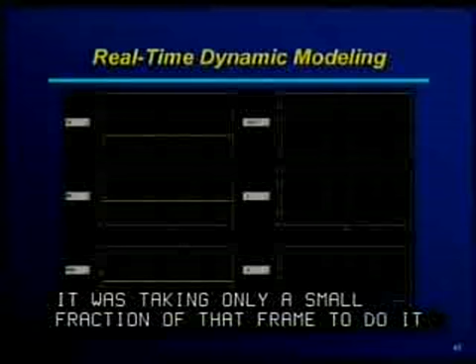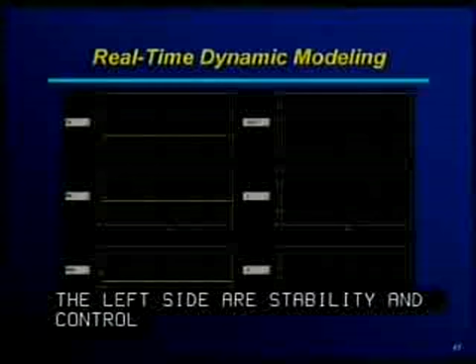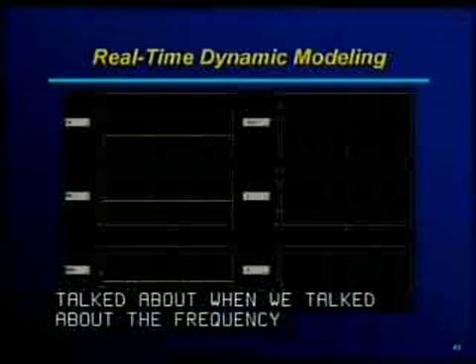So as before, what we have here on the left side are stability and control derivatives. I believe it's on the top there, m sub alpha, and the middle one is mq, and the last one is m delta e. So those are those same parameters that we talked about when we were talking about the frequency domain and the time domain modeling methods. Then on the right, you'll see from top to bottom angle of attack, pitch rate, and the elevator deflection in degrees. And I want to mention, too, that we're shown here just these longitudinal results, but the results were being computed in all the axes.

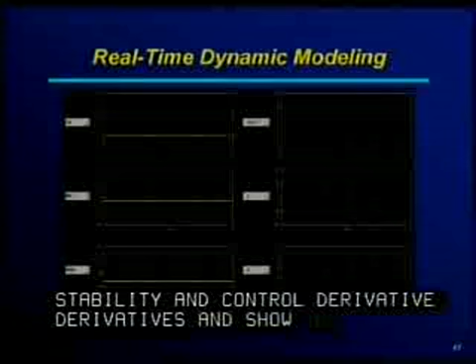So there are many others, that's why if you see on the left there's our pull-down menus. I can select any number of the stability and control derivatives and show that trace, but I only have one trace to show you here on the video clip. But it works for all of the derivatives at the same time in real time.

Because it worked in real time, everything I'm going to show you in this next clip was done as soon as the aircraft landed. The thing that was not done was drawing that yellow line. I had to go back and take that data, reanalyze it using our iterative nonlinear optimization technique to draw that yellow line, so you can see where the right answer is, you might say. All right, so let's run the clip.

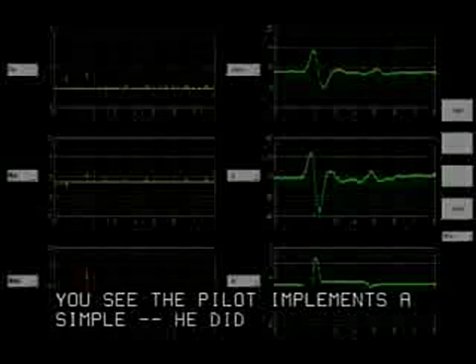So you see the pilot just implements a simple doublet, and he did that on the rudder and also on the aileron as well. I don't know if you can see, but the estimates at the beginning look a little closer at the start than they did before. The reason for that is that we actually turned on the real-time estimator before we told the pilot to do these doublets. So in his natural maneuvering, the system actually got pretty close to the right answer, even though he was not doing any maneuver specifically designed to collect information for the identification. So it's a very encouraging result.

You see that after the doublet starts coming in, the difference between the final answer and the answer obtained with the batch estimate is almost the same. And those error bars come down as you get closer to the answer. So the important thing is that this technique not only gets the right answer, you might say, but it knows when it doesn't have the right answer. If it's off the right answer, it knows that, and it gives you a larger error bound.

And that's critical because, especially when you're doing real-time reconfiguration of the control law, or updates of the onboard modeling, you need to know what data is good and what data is not good. So the error bars are really critical, as I said before, the frequency domain method is really the only one that does this. So that was really a very encouraging result - the first time, to my knowledge, that real-time parameter estimation has been done in multi-axes, actually in real time, and of course also on an unpiloted model.

So, next slide, please. Oh, and so here, this is just the final slide that I was talking about before. Okay, so let's go on to the next slide.

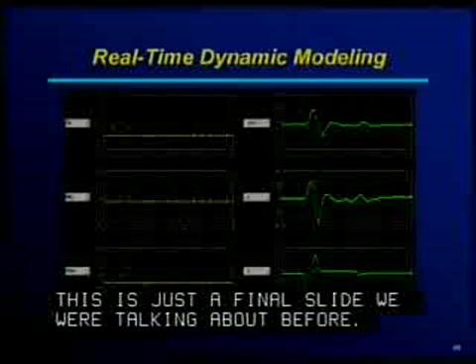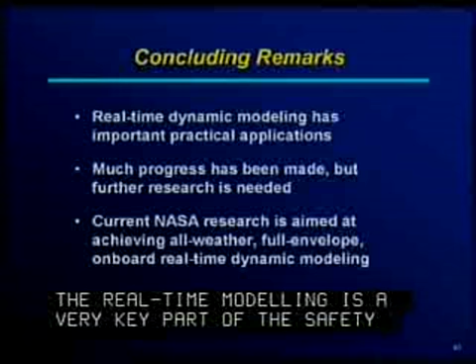So finally, in conclusion, I have just some very general things to say. We've come a long way with the real-time modeling, and I hope I convinced you that we have some good practical applications for it. The real-time modeling is really a very key part of the safety program, both for reconfigurable control and for vehicle health monitoring, vehicle health management, I believe it is.

We've made a lot of progress, but we have a lot of things to do yet. We have to solve the data memory problem that I spoke about, and that really has to be done with sort of an information management executive, you might say, on board the aircraft. It takes a look at failures and takes a look at the information it has from the real-time estimator, flight condition, and so on, and determines whether we need to buzz surfaces right at this moment or whatnot.

And we also, finally, we have this method that does a really nice job of getting us a local linear approximation to what is really a nonlinear dependency. And it changes its orientation as we go, as I mentioned.

What we'd like to do is fold that back into some onboard global modeling of the aircraft, so that it can update its global model of what it thinks this nonlinear dependency is and carry that onboard the aircraft. So eventually the aircraft could carry its own idea of how it behaves. That's the ultimate goal, and once you have that, all kinds of doors open up. That's what we're aiming for, and the current NASA research really is aimed at achieving that all-weather, full envelope real-time dynamic modeling.